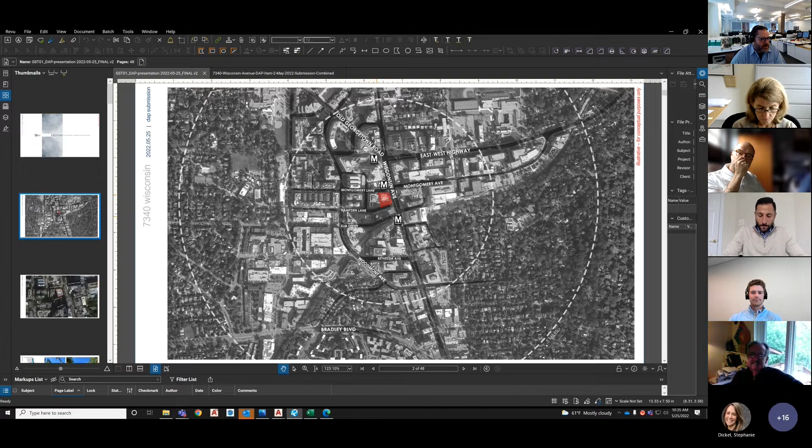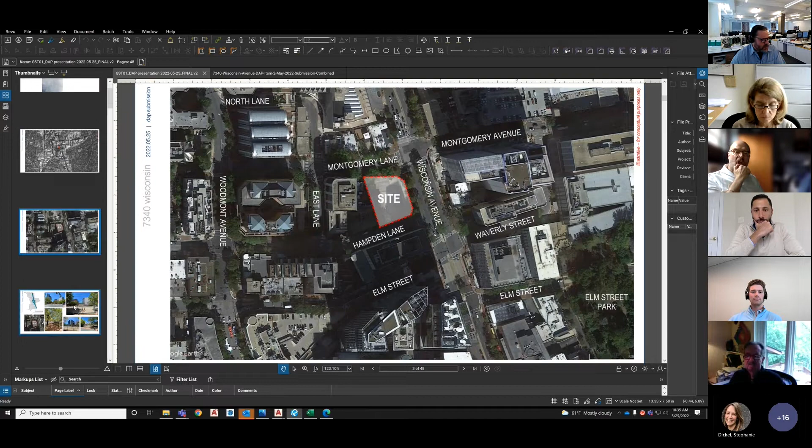Obviously this is a very predominant site at the heart of Bethesda on Wisconsin Avenue, with Montgomery Lane on the north, Hampden on the south, immediately across from one of the Red Line elevator stops, and then the new Purple Line station is just a block to the south of us. Going forward, this is obviously the Exxon station that everyone has seen fenced up for almost a decade now. So we at SK&I are very excited about this opportunity to transform and elevate this site to what it really needs to become.

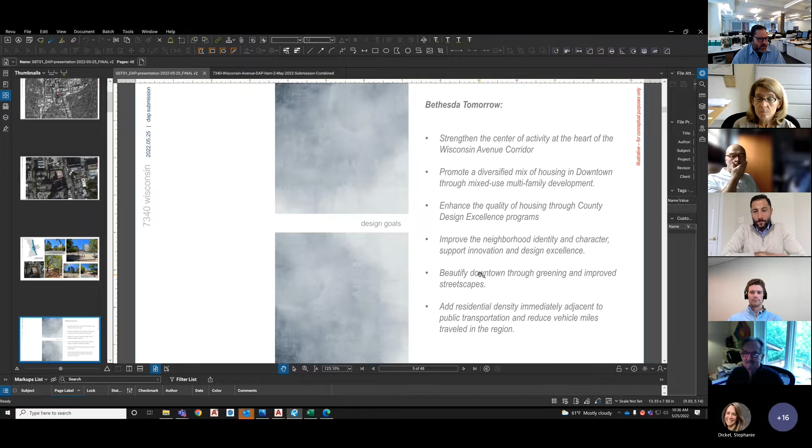I don't need to go through the images, you're well aware of the site. We wanted to just define the goals of the project: strengthen the center of activity at the heart of the Wisconsin corridor, promote a diversified mix of housing in downtown Bethesda through mixed use multifamily development, enhance the quality of the housing through the county's design excellence programs, improve the neighborhood identity and character, and support innovation and design excellence. Beautify the downtown through greening and improved streetscapes, and add residential density immediately adjacent to public transportation to reduce vehicle miles. These are all statements at the core of the Bethesda plan, and we're very excited to deliver those.

So just taking a step back, we wanted to walk through what was previously approved, so everyone has the same basis of starting point.

This is the building mass. It's allowed to go 250 feet. It has a 6-story base up to 70 feet, and there are 2 major street types. This has 3 frontages with 2 street types. We'll go through that in a moment, but the basic gist is that each of the step backs are 10 feet on the 3 frontages, along with a 22.5-foot step back at the property line.

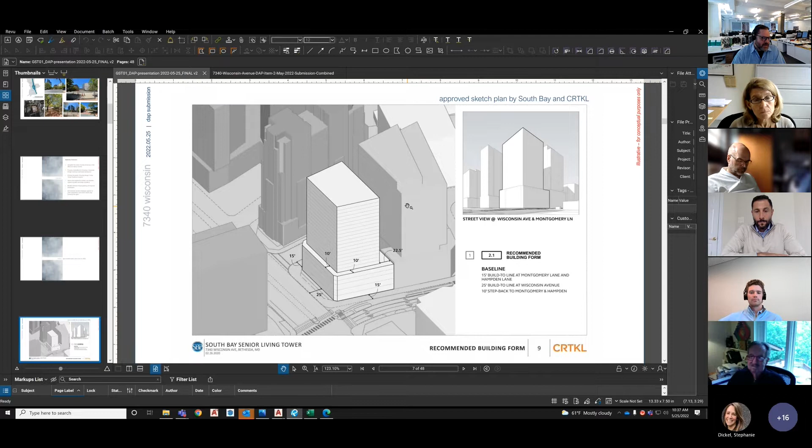This does tie into another project going through site plan review to the west of us, the Hampden East project. One of the things we did in the last couple of weeks since we submitted this to you is refine that massing to better reflect what was approved at that site, or what was submitted at the site plan submission. We had previously used sketch plan drawings to refer to that, so that's one of the updates.

So again, this is the massing that the previous ownership team pursued. The big takeaways here that we thought were interesting were pushing in the midpoint, at least along Wisconsin, and inflecting the corners back out. This massing primarily allowed the step backs, but then pulled the building towards Wisconsin and Montgomery Lane, so there was a significant corner tower, sort of a tower on the tower.

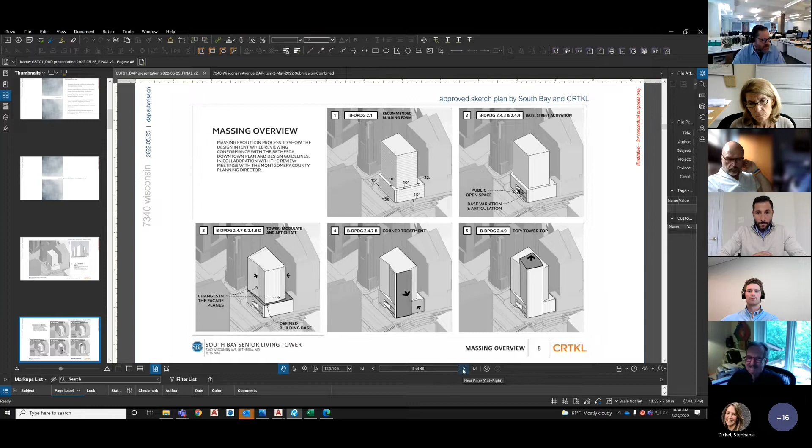I think that's interesting, and we thought there were some interesting points to that, but we wanted to challenge it a little bit because the use is a little bit different, and we thought a slightly different strategy could be employed here.

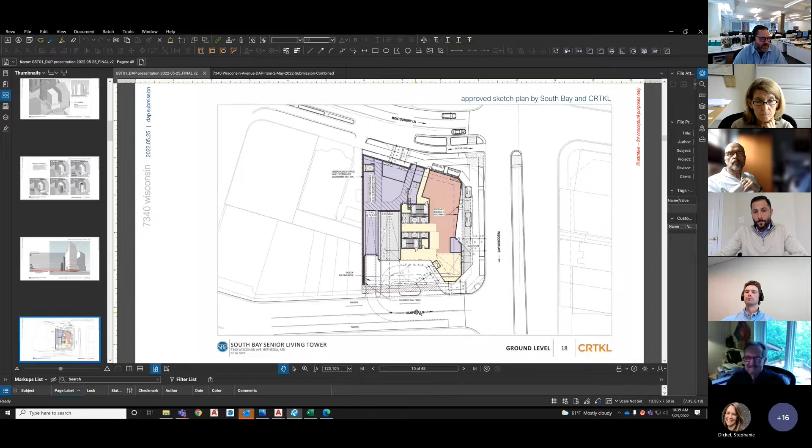Another thing we've done is look at the previously approved ground floor plan. The big difference between the 2 projects is this large porte-cochère drop-off on Hampden Lane. All of the service, all of the garage entrances, and this covered porte-cochère were previously approved, and you'll see that we've removed that and filled it in. We swapped the retail and the residential lobbies, and we'll talk about that in a minute. But the big thing is this is gone, and we've reduced the amount of curb cuts on Hampden Lane.

So going back to our massing approach, working with Greystar, working with their program, and working with the massing that was approved and the density allocated for the site, there's an opportunity here for 3 active frontages on Hampden, on Wisconsin, and on Montgomery. Hampden and Wisconsin are relatively flat on this site, but Montgomery goes downhill quite a bit, so we really saw that as a challenge for continuous retail on Montgomery, and we can talk about that.

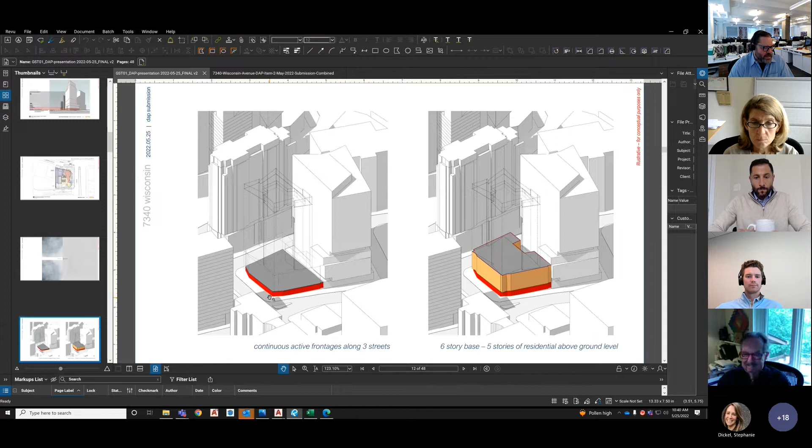That's why we located the address at the corner of Montgomery and Wisconsin, with the retail on the south side of the project, closer to the Purple Line station, and in conjunction with the existing retail at the Elm, the new retail on Wisconsin at the Metro Tower to the south of us, and then our corner retail here. So there's an opportunity for 3 continuous pieces of retail around the Purple Line station.

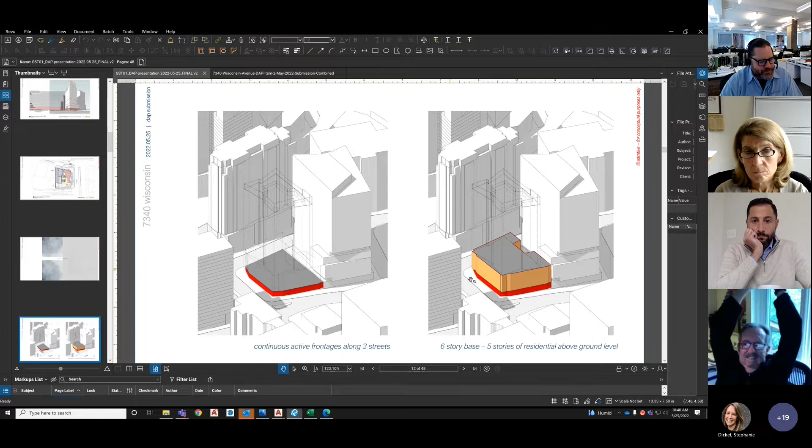Then we extend that up towards the 6-story base with 5 stories of residential, filling out that base similar to what was approved. The big change and the big idea here is resculpting the tower. Instead of a tower on a tower, this footprint isn't that big, so we thought this was an opportunity to just let the tower be a tower. We recrafted the footprint of the tower extrusion, taking that idea of inflecting the midpoints of all 3 frontages, and then pulling the corners out to create this pinwheel shape.

We redistributed that mass that was allocated on Montgomery Lane, and there was a previously approved mass on Hampden, and we've taken those masses that went out to the building face and redistributed them towards the corners. This is a diagram of pushing this in and then extruding out, pushing in and extruding out, which really creates this pinwheel shape in floor plan, very dynamic.

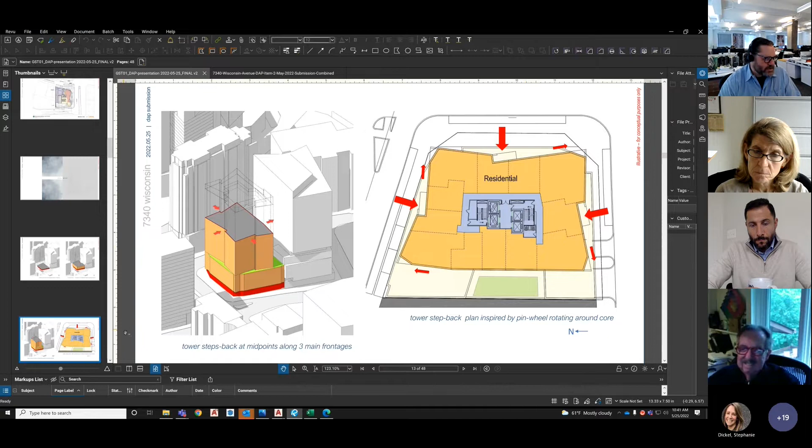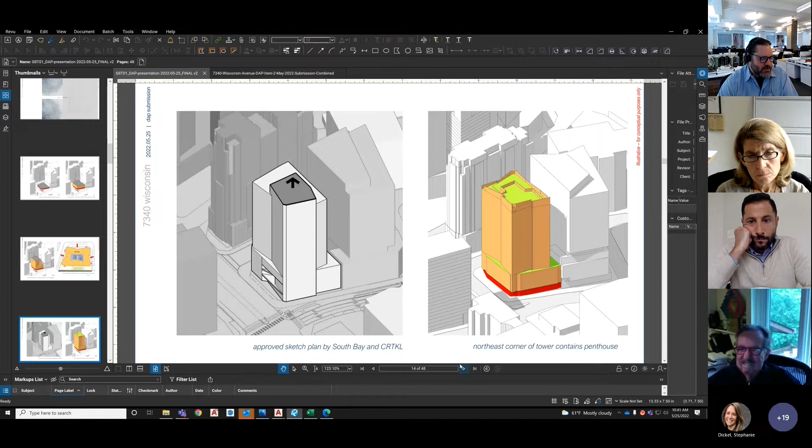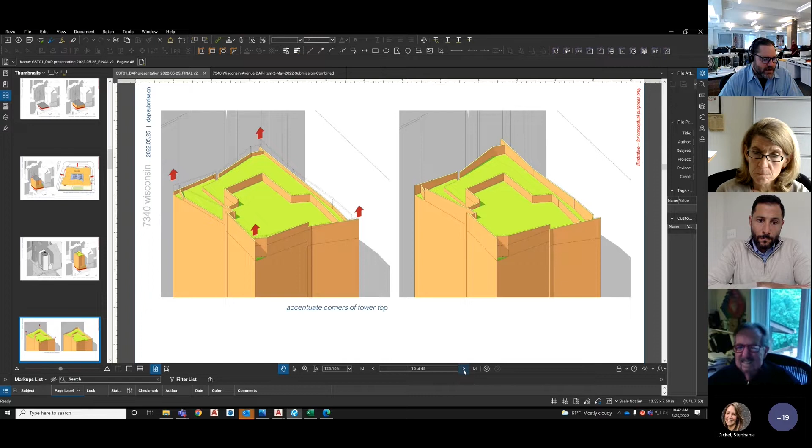While letting the corners really become ornamental and sculptural at the edges, instead of having a tower on a tower, we thought this is an opportunity for the whole building to read as a singular tower. We're essentially tugging the corners of the tower to create a sculptural and dynamic crown to the building, in conformance with and inspired by the design guidelines.

So I can just walk you around the building with our proposed massing. We dialed it back a little bit to give you a sketch plan sort of introduction to the building, but then we've been working towards site plan. We're repositioning this as a hybrid, a simplified massing. We'll come in with more windows and glazing, and you'll see a lot more detail, but this is the inspiration and direction we're working towards.

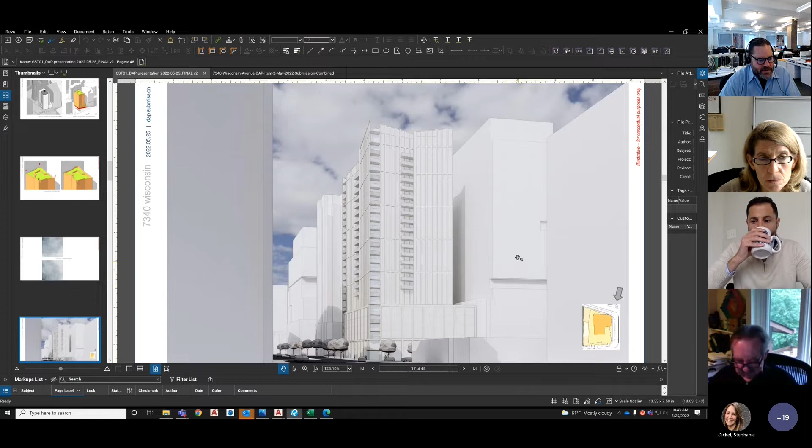One of the things we redid was the massing here for the Hampden East project to better represent what was approved or presented at the last DAP. We're just sort of working around the building.

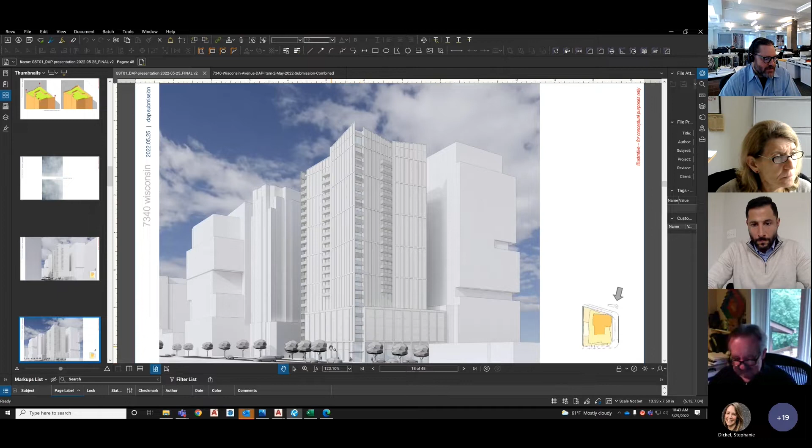This is that same northeast corner from across the street. Again, you can see the sculptural elements of the crown, those setbacks coming down, landing on the base. We'll have active frontages on all three sides. Retail is going to be on the south, and this will be the primary residential address of the property on the northeast corner.

This is a view looking at the Wisconsin Avenue facade. Again, the crown of the building stepping up. We're locating, and you'll see in the plans later on, the penthouse essentially on the northeast corner. So we're using that extra volume of the penthouse at that corner, which was previously approved as well, creating that dynamic skyline pointing north.

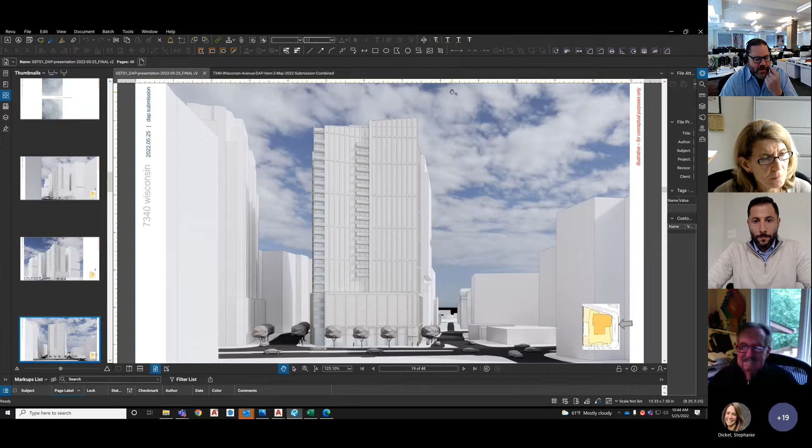This is a view of the south face on Hampden. Again, very similar architecture, the setbacks really creating those deep moments in the facade, the depth, the angular transition, and then we have the balconies in those locations. You can see the relationship with the Hampden East project to the west of us, and that 22.5-foot step back creates that tower separation.

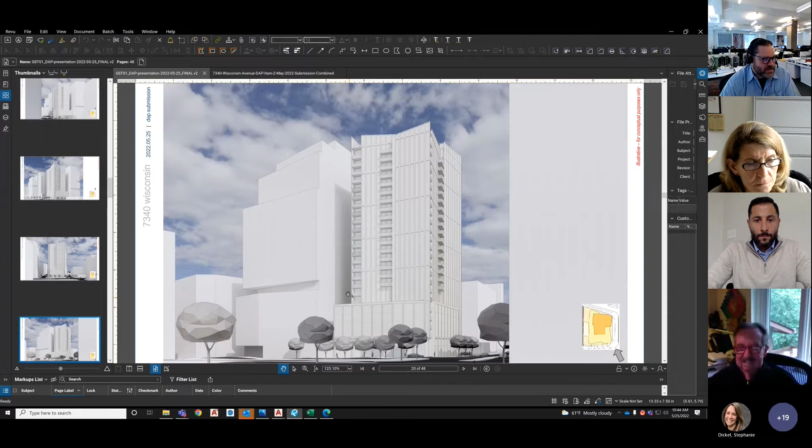This is a view kind of rotating back around on the backside of Hampden. This is where you'll see we'll have our garage entrance here and our loading docks here as we develop those even further.

This view is now back on the north side of the building, on Montgomery Lane, where you do have that grade change. It drops down towards East Lane to the west of the project, with the new Avocet towers directly across the street, with their large canopy of the penthouse, which creates this dynamic skyline between all of these towers playing with each other.

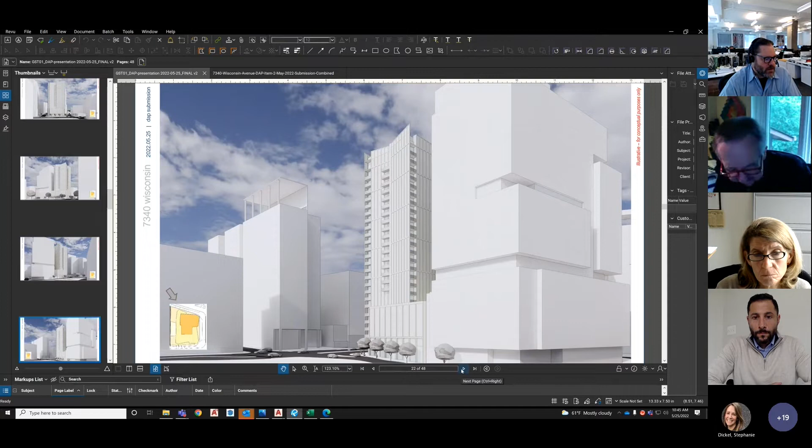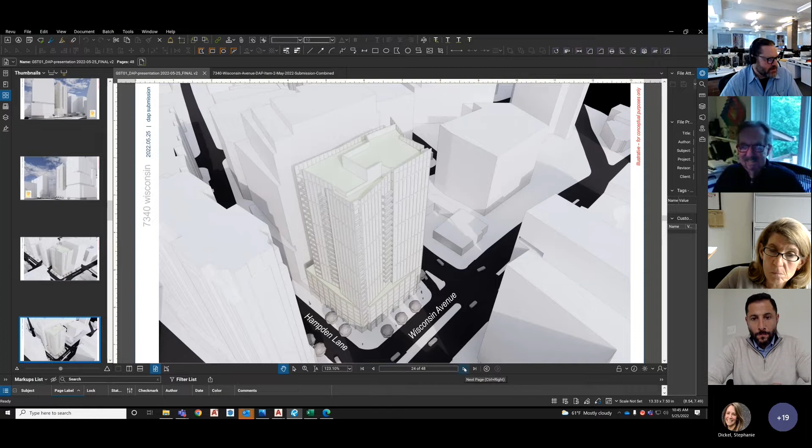These are a few bird's eye views looking down. Again, you can see the step back and this pinwheel to let the tower read as a singular piece that rises off of the building base. We'll work our way around these diagrams. I think the step backs are very visible, very meaningful and impactful to this massing diagram.

And then this is the Hampden Lane bird's eye view. We'll walk you through, we did a bunch of diagrams as you've seen based on these perspectives, and then back on the Montgomery Lane side.

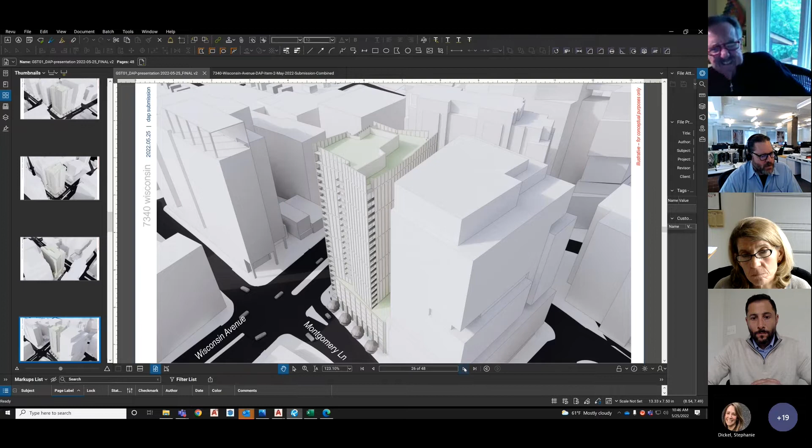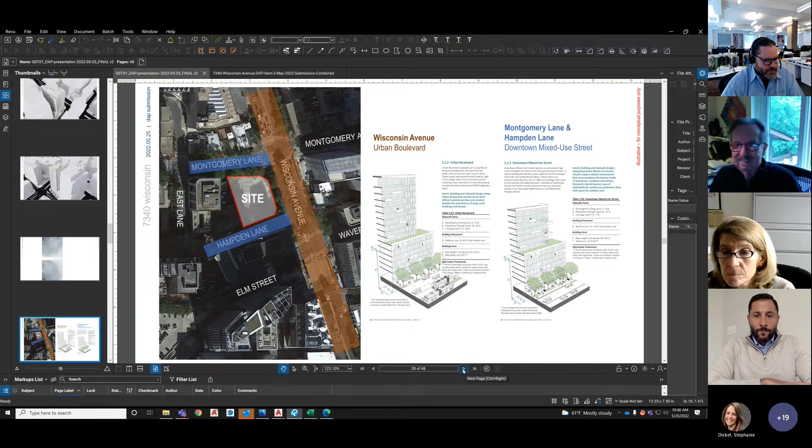So how did we adhere to the design guidelines? Like I mentioned earlier, we essentially have three frontages. Wisconsin Avenue is the urban boulevard, and then both Montgomery Lane and Hampden are the downtown mixed-use streets. They do have different building placement lines. Wisconsin's the most gracious, with a 25-foot streetscape, while Montgomery and Hampden are a little narrower at 15. But all the step backs, the main step back, is essentially 10 feet minimum. So with that, we diagrammed each of the different frontages so you can understand how we complied with and enhanced the design through the design guidelines.

This illustrates a few things. Obviously, that 25-foot setback or the building placement line on Wisconsin. We're providing essentially a 6-foot tree pit, a tree zone, a 10-foot pedestrian zone, and then a 9-foot building frontage zone to meet the 25 feet.

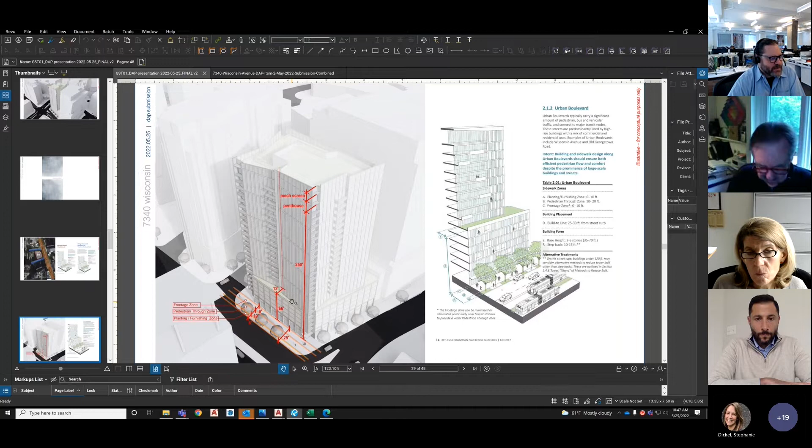The building is a 6-story base, 5 levels of residential over the ground floor. That equates to about 66 feet, so it's under the 70-foot prescription. We're inflecting these, so the back part of all these step backs is essentially 12 feet, and we angle out from there. We're exceeding the step back by 2 feet and bringing it back towards the corners.

We go up to 250 feet, which would be the roof, and then above that we have the penthouse. Specifically on this corner, we'll have the mechanical screen and equipment for all the mechanical elevator overruns, et cetera, that are required for these buildings.

This is the Montgomery Lane diagram. You can see the 15-foot building placement. These are all sort of the minimums, but it's in line with what's happening to the west of us at Hampden East. We have a 6-foot tree zone, an 8-foot pedestrian zone, and then a 1-foot building frontage zone.

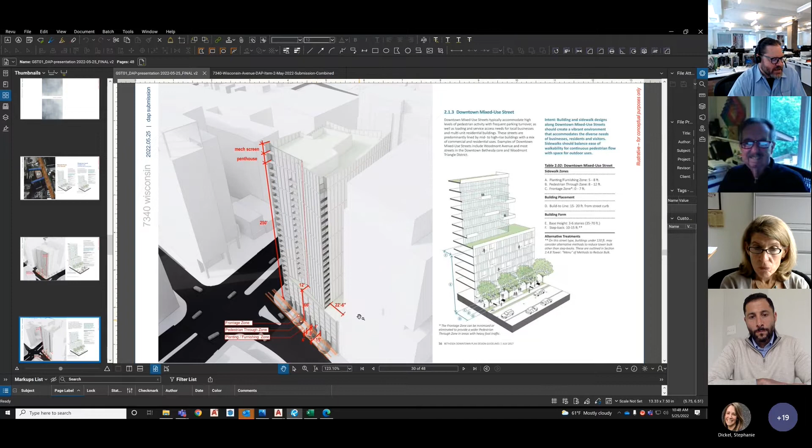Again, the step backs are all the same, but you can see the 22.5-foot tower separation step back on this one as well. Moving over to Hampden, essentially the same prescriptive measurements: the 15, 6, 8, and 1. A 6-story base, 250-foot tower, and then the penthouse.

On this side, you can see we'll be putting most of the penthouse massing similar to the approved sketch plan on the northeast corner, and we will have pool zones up here as well as residential amenity terraces.

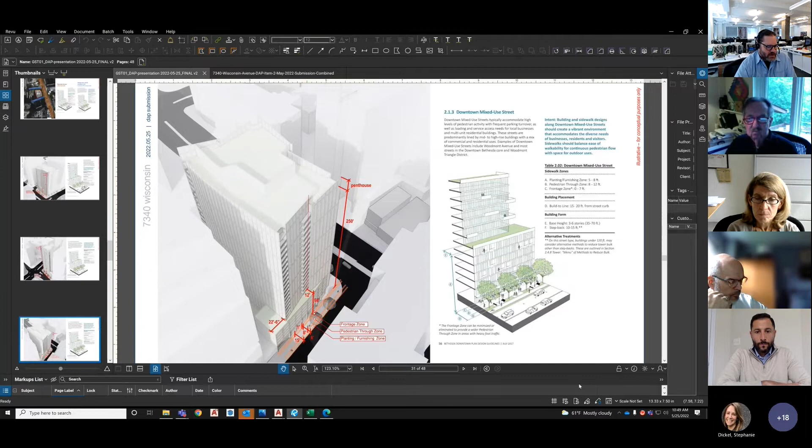One of the things we're working on right now, which we don't have all the details on, is we kept it basic for you all. Landscape and civil are now working to meet the 35% green coverage to get the stormwater quantities. We're working all that out as we're right in the middle of it, so we'll come back with all of that at the next step.

A couple of things we'd want to talk about: the service access parking. We have the curb, we have the existing—obviously it's a small Exxon station with 3 massive curb cuts on the 3 frontages—and how we'll be cleaning that up on all 3 sides.

One thing we know we need to work out, but don't have the information yet, is the anticipated bike lane—we see what's built across the street at the Avocet Tower, and we know it's planned to come across the street and go down Montgomery Lane. We just don't have that information yet, and we'll be working with landscape and civil to integrate that into the site plan submission.

But essentially, we'll have 3 clean frontages, and all of the loading and the garage entrances will be here on the southwest corner on Hampden. To compare that to what was previously approved, it substantially cleans up the Hampden Lane facade by taking that porte cochere out and limiting it to just 1 loading dock and 1 garage entrance.

Let me just go back to this one real quick. Going back to the retail, we are putting the retail on the south corner on the Hampden and Wisconsin corner. We do have some building utilities.

We'll have to integrate a fire control room, some exiting, but the main lobby will be here on the Wisconsin and Montgomery Lane corner. As this goes downhill, we imagine this to be relatively flat and stay at the same level, so as you go downhill, the ground floor will be above you.

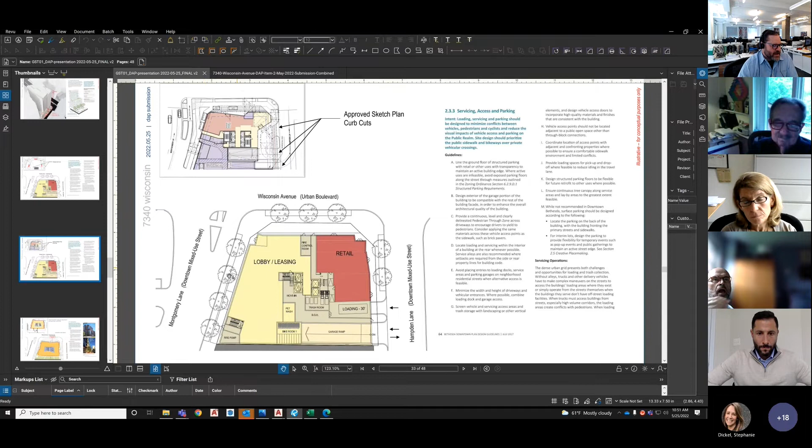But we intend to have this all be amenities for the building, possibly the fitness center back here, the lobby leasing. So it'll have a very active storefront that'll be just above the grade as you go downhill there. So I wanted to describe that to you.

Going back to this step back diagram, I think this was the main thing that we really wanted to get you all on board with, was this strategy as we move forward, because this is so important to designing the building and delivering this for Greystar.

Essentially what our takeaway was, this was the approved sketch plan here in the top left. The massing was predominantly concentrated on that northeast corner, and then it also extended south onto Hampden Lane. So those went out to the building face, or the build to line. They obviously kept the 22.5-foot tower step back, but those concentrations of mass we thought could be done a little bit differently.

So going back to that pinwheel notion of pushing in the three centers and pulling out the corners to create a dynamic footprint, and distributing that similar mass around the building. So you always had the step back on all three sides, and then the corners became much more dynamic and interesting, which is something we thought was compelling.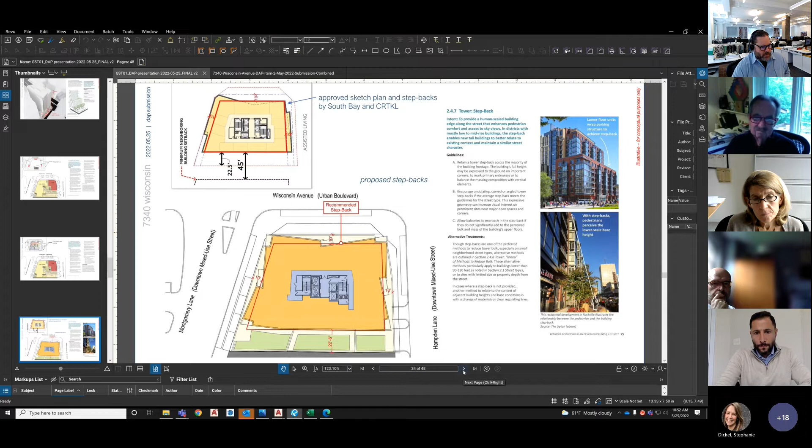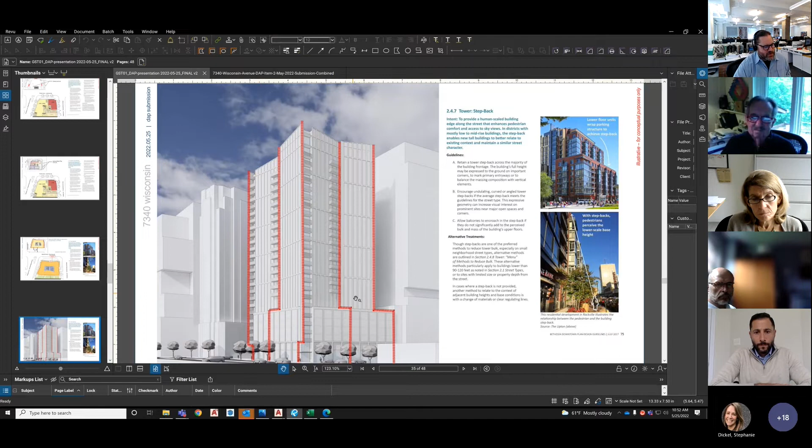And those are also very meaningful units for the residents. How that translates visually through the tower step back diagram, with the corners pulled out and then the midpoints pushed in to really create a dynamic tower sculpture.

Just giving you a hint of what we could be doing and what we will be doing, we see this as a singular facade all the way up and down, but the base of the building will probably have a little bit more solid feel, with the use of piers, grounding the building, and active frontages on the three sides. We will celebrate the corner entrances, the residential, and the corner retail.

And then extending that up through a series of potential bay balcony extrusions here, and then letting the corners come down and extend through the base of the building, but stopping it at the second floor to have all the view clearances that the county would like to see.

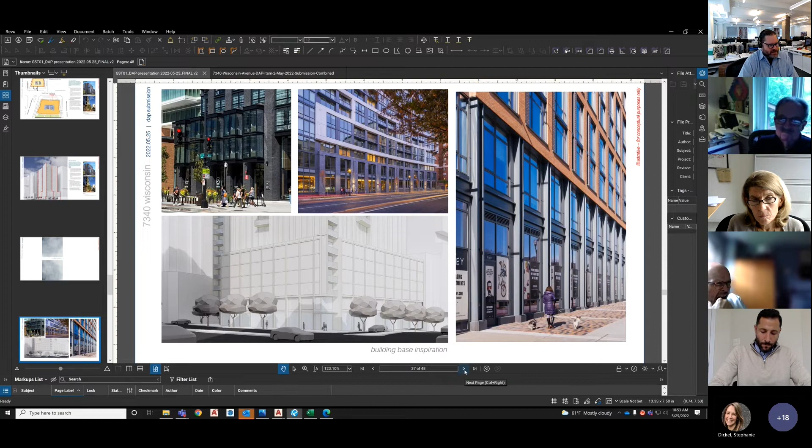And then going up, how that frame of the building can be expressed through glass and metal, glass and panel of some version, with the balconies reading at the corners, the balconies reading at the insets, and then crafting the tower top, maybe going up a little bit higher at the corner that has the penthouse plus the equipment screen. There are a few different ways to do that, but this is one of the inspirations of having the angular corners all pulling in different directions.

And just for reference, we left the building plans in here for your reference, but essentially, if you have any questions, I think we can probably open it up to discussion.

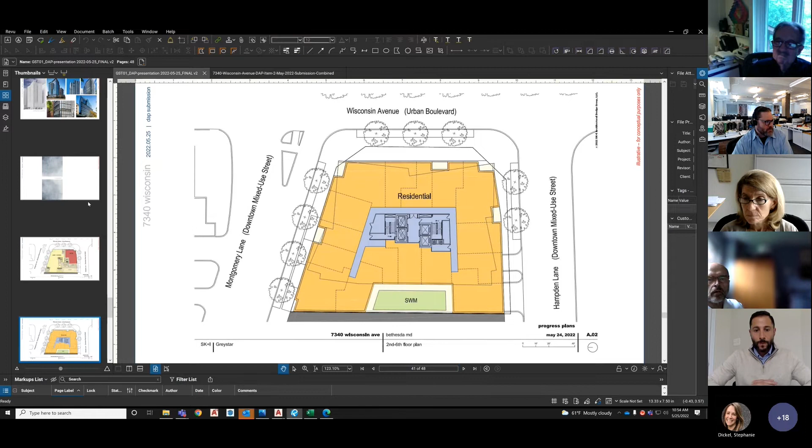So this is Rod. I actually like the massing better than when it was a senior living facility. I think it's subtly better, to be honest with you. I do have some comments, though.

First off, your context drawings where you're showing a lot of the neighboring buildings around there, why didn't you put in your project at Wisconsin and Bethesda Avenue?

It's just the size of the file that got a little unwieldy.

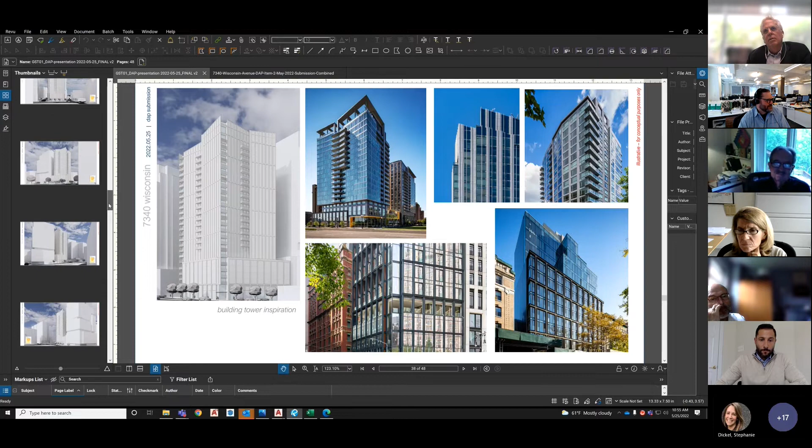Well, there's a point that I would like to make, in that a town, a city is built of a great deal of diversity of building types. And I would hope as you develop this, you would develop a material strategy that is different than the building at Wisconsin and Bethesda Avenue, to create that diverse quality that you always find in cities.

And I think that'd be my major point. A minor point is I like what you're doing with the top. I think you weaken it a little bit by showing that line between the penthouse and the mechanical space. And if that line just went away as you develop it and refine it, I think it would have more strength.

I don't know that it needs more mass to it. I like the idea that you're not, in this case, accentuating the corner at Wisconsin and I forget the cross street, not Hampden, but whatever that cross street is in front of us. Yeah, Montgomery. Right.

Hey, Brian, you're on mute.

I also have a question. Sorry, go ahead. So for the west facade, it's facing the East Hampton building. I know that you guys are meeting the tower separation. Since this is a residential building, how would the light and air work on this facade since it's so close to the next large building?

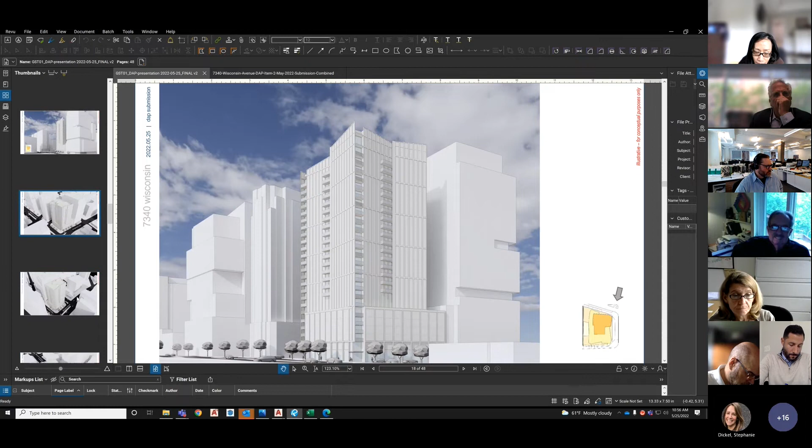Yeah, this is probably the best view of it here. So if you remember, let me jump back a second. This building is actually a multi-use building in the sense that it has ground floor retail. Only the base, only the bottom 8 floors, is residential, and then from the 9th floor up to maybe the 21st, 22nd floor is office space.

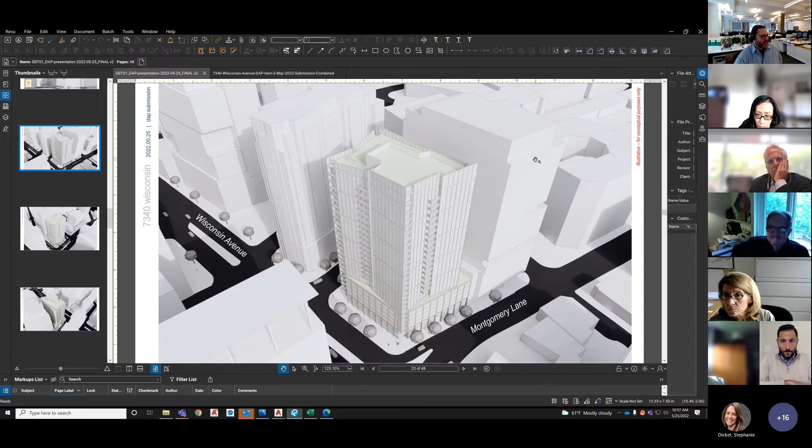So this will be an office building from the base up, and I think our building on the west face of it, adhering to that, will have units up here. They have, those will be 22 and a half, and they have 22 and a half. So we'll have the 45-foot tower separation between there. And then our lower units, we do build out the corner, build out this piece. And then there's a light well.

There's a pretty significant light well down there, open space. And then they're fully open, I think, on the south side of the building. So based on the design guidelines, there's adequate tower separation and light and air down in there. Obviously, another factor is this will all be green roofs. So actually those are quite, when these green roofs are built out, I think they'll actually be kind of a nice place to be, because there's a lot of vegetation in there, and it'll be probably a little bit cooler.

Okay, I think they tend to be nicer than they probably look in these views, given the amount of vegetation that goes on these roofs now. But I'm just wondering that the units along this facade might not have the best light and air and views given the distance from the next large building.

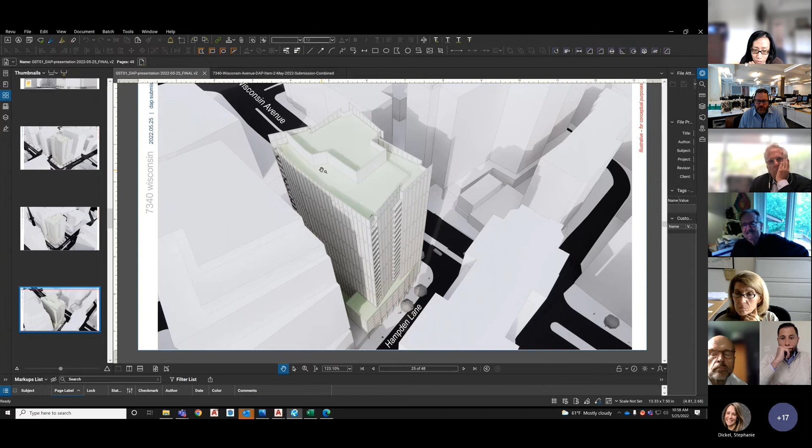My next question is, this is not really a design comment. I know that this is a business decision that you guys changed from senior living to residential development. What's the reason behind it? I mean, it is a different applicant. The prior applicant decided not to go forward, and Greystar is a residential developer. So totally different applicant.

And this is a sketch plan application, right? Because I don't see a very detailed developed ground floor or site plan yet. No, and maybe I wasn't clear in my initial remarks. So we are in for site plan. However, it is our intention, what we wanted to do is first get the panel's support for the general massing and such. And then it's our intention to come back right after we file the site plan application with what you would typically see in terms of level of detail for a site plan DAP submission.

Okay, I'll look out for that next presentation. Thank you. Yeah, I just was trying to say, hopefully you can hear me this time. I was trying to say before that I agree that I think the massing on this is much better.

I'm always suspect of towers within towers that are not real. And in this case here, pushing back the center points of the facades and creating this kind of pinwheel motif around the building, I think creates a massing that is holistic and really tied to the idea of the building in a much better way.

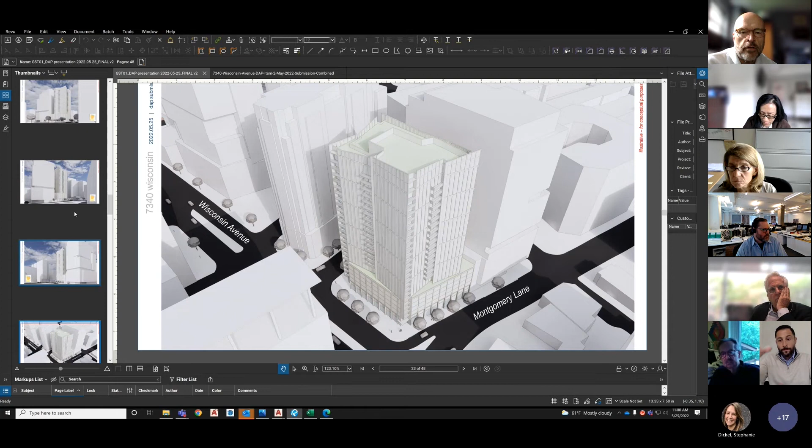I also wanted to say, as I think that the shift in use has created a better ground floor plan, particularly much more friendly to Hampden Lane than the prior use. So it looks like you're going in the right direction there. I think the massing has a lot of potential to it. I'm a little bit worried about the thinness of the crown at the very top when the curtain wall just extends up.

I think you're going to want to think about exactly what goes on there, what that fin-like characteristic looks like. But you know, you guys are smart, so you'll be able to solve that for us for next time.

Yeah, we'll be working on that. And I think I hear that along with Rod's comment about making this different. We do have a tower under site plan several blocks south of here, so making it different—yeah, we hear that as well. So I think some of those details we're definitely working on and working towards.

But we really wanted to get the sort of massing blessing that gets you all on board with that idea, because without that we didn't want to go backwards. It's also interesting, the building to the immediate south, the tall building, is much more traditional in nature, so I think that will help with the diversity comment as well.

Mm-hmm. I think the massing is much more interesting. I think it complies with the approved plan where it needs to, and it cleans it up, as you've said very well, at ground level. I am just a bit concerned as it goes down the hill. You described a wall as you're walking up.

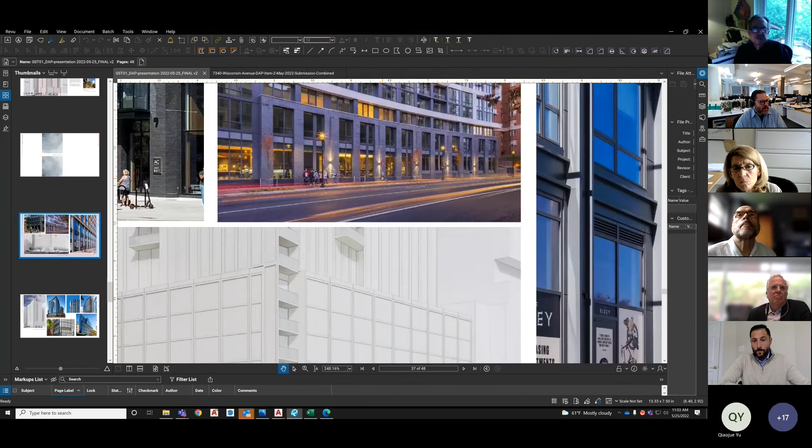Well, I haven't heard a real dimension. Is it high, 3 feet? Yeah, it's about 3 feet. We have it here actually on the edge. This enters on the corner up a little bit higher, and you can see it here. It's only a couple of feet for the ground floor as it goes up, as the grade changes. So it'll be very similar to this. I think it'll be subtle.

The key is really, it's not a good location for retail without stepping the slab significantly, but for a residential lobby and amenity sequence, I think it will work quite well—it'll only be a couple feet as it goes downhill. It's something that we could. The devil is in the details. I mean, you can solve it, I'm sure, but I presume the support of the building will come down to ground, and the elevated portion will be treated not as a major facade element, but sort of recessed.

That'll help. But we'll look next time. I have every confidence you'll solve it. If it was 5 feet, I'd say maybe you ought to step the slab, but if it's only 3 at the worst, that's probably fine. I think your changes are creative, and I think it will yield a very nicely iconic building on that corner.

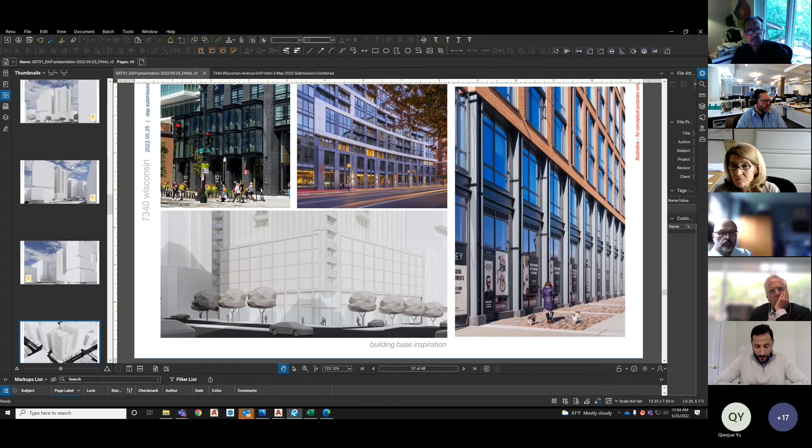Great, and I agree with everyone's comments. I thought Brian summarized it pretty well. I was always a little skeptical with the previous proposal, the previous applicant, doing a senior and assisted living project here at this scale, at this kind of heart of the urban environment. So I think the change of use probably makes better sense from a market standpoint. And as Brian mentioned, it does clean up the streetscape along Hampden quite nicely, because you need the pickup and drop off for senior and assisted living, but here you can negate some of that need.

So yeah, I agree. I think this is headed in the right direction.

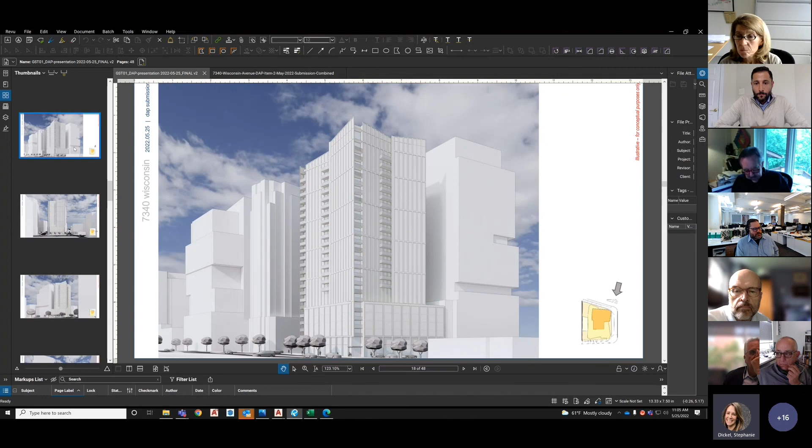Well, we're excited to get back to you with the detailed site plan DAP submission after we actually file the site plan, so hopefully you'll be seeing us shortly. Yeah, so with that, if there's no other comments, as Pat said, this project will come back to you before it goes to the board for site plan, so I don't think there's any need for a straw vote at this time unless you feel differently.